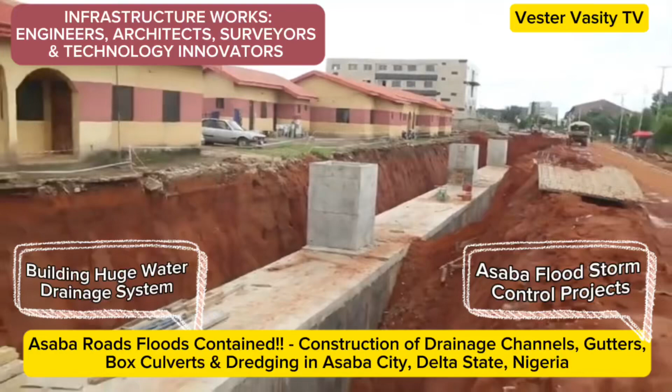The subject of discussion today is Asaba flood control projects.

The master plan projects consist of building a huge water drainage system with a network of drainage channels, gutters, box culverts, and the dredging of adjacent rivers, including sections of River Niger. It is a master plan consisting of 4 projects that all states in Nigeria, and African countries in general prone to flooding, should embrace and use as a model to control flooding in their communities.

Important things to note about this master plan: 1. It will create permanent maintenance jobs for the communities. 2. It will encourage foreign investment in Asaba City. 3. It will increase the GDP of Delta State and Nigeria.

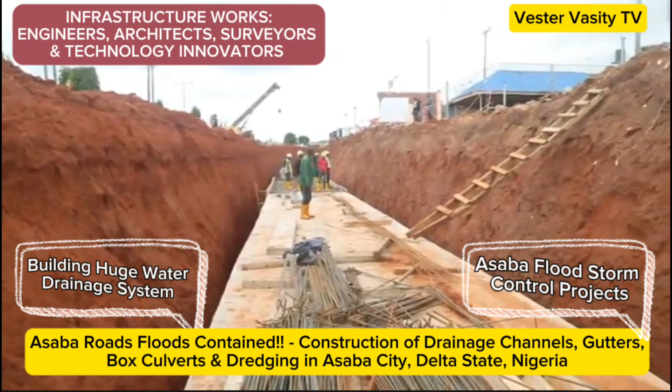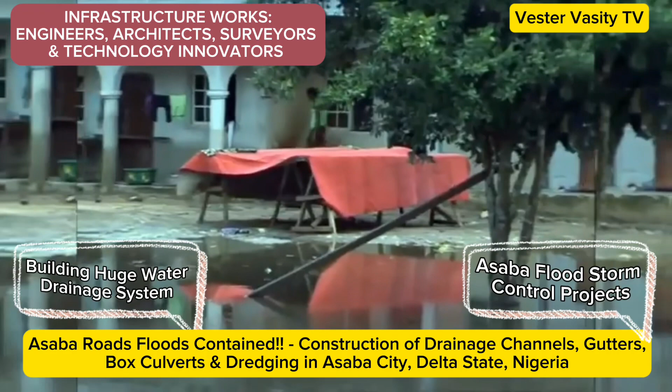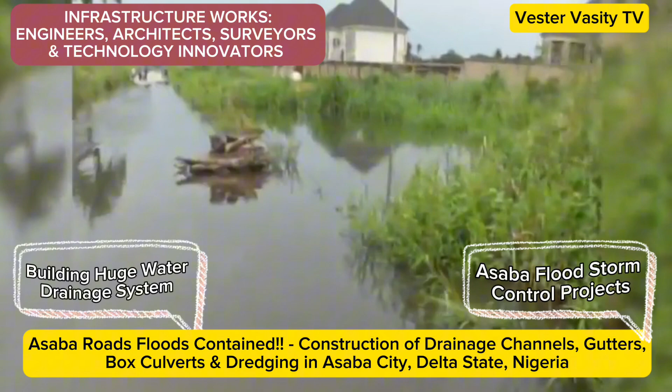Delta State, as a coastal state, has a peculiar topography that has made most communities prone to flooding and erosion. The fact remains that humans cannot stop the rains from falling, nor stop flowing surface water from bursting its banks. That is why it becomes important that people prepare for them or take steps to avert the devastating impact. We have a lot of tributaries of River Niger around the state, so it's prone to flooding.

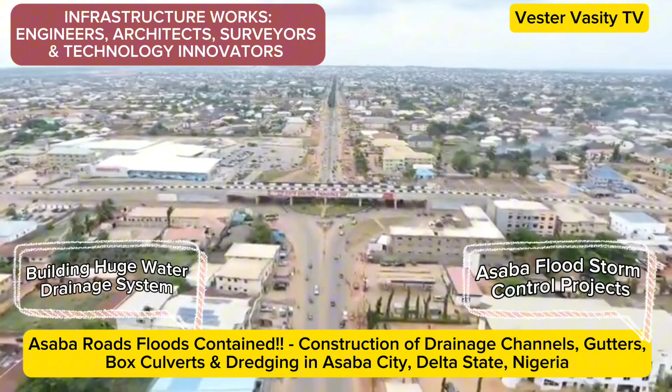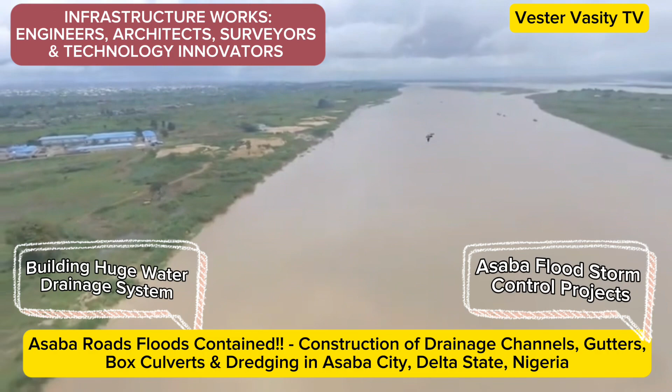Asaba, the state capital, is flood prone as it is situated at the end of a hill that starts from Okpanam town and the very low valley that stretches to the River Niger. These two factors have perennially made the city a receptacle for flood.

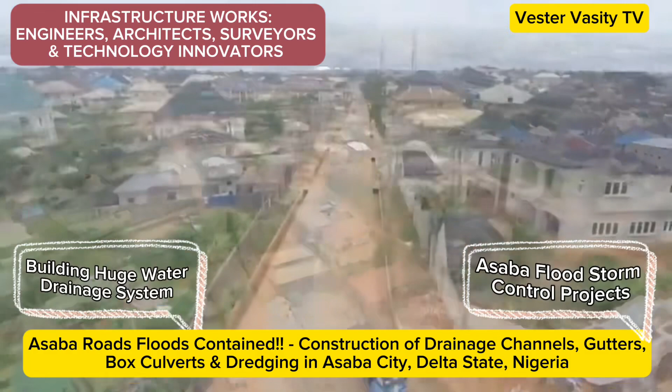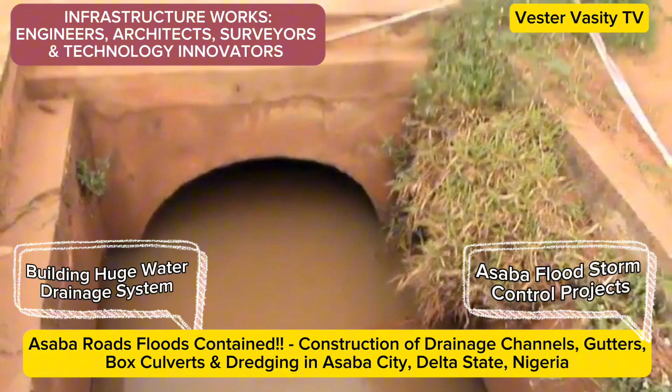With the increase in structural development of the Okpanam axis of Asaba metropolis, the menace of flood has in recent times become a huge challenge, as even the drainage projects done by previous administrations have been grossly overwhelmed by the large volume of flood.

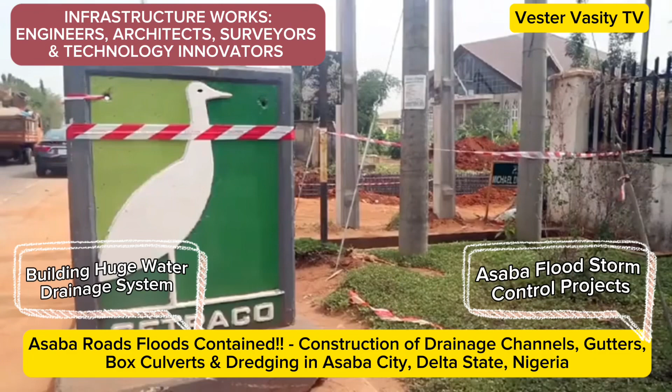We have engaged two very notable construction firms, Setraco and CCC, who are currently working on the flood issue from the Okpanam end and also in the Asaba metropolis. And we believe strongly that this will really help. If you go around the city, you can actually see it. When you talk about storm drainage, it's really storm drainage in the true sense of it.

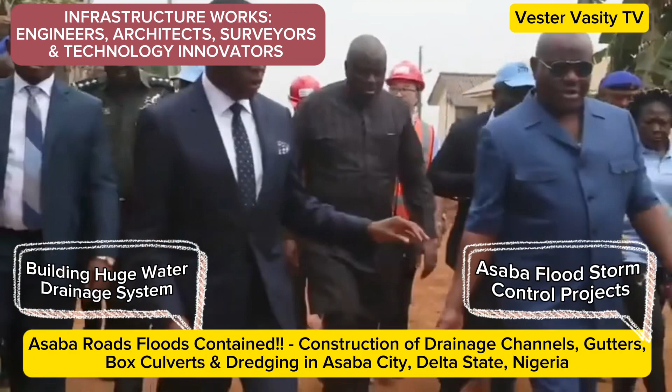In the face of this huge flood challenge, the administration of Senator Dr. Ifeanyi Arthur Okowa developed a master plan to tackle the menace in the capital city. The project, tagged Asaba Flood Storm Control Project, involved building a huge water drainage system to contain the massive flood that disrupts traffic and ravages homes in the heart of the city at each rainy season.

We've started 4 major projects in that direction. The one that is draining the Jesus Saves area, and another one, because we took different segments of the town, is being done by Setraco, that is going to drain the whole of the DBS area. Another one being done by CCC through the Ralph Uwechue Road, that is going to drain off the huge water storm coming in from the Okpanam area.

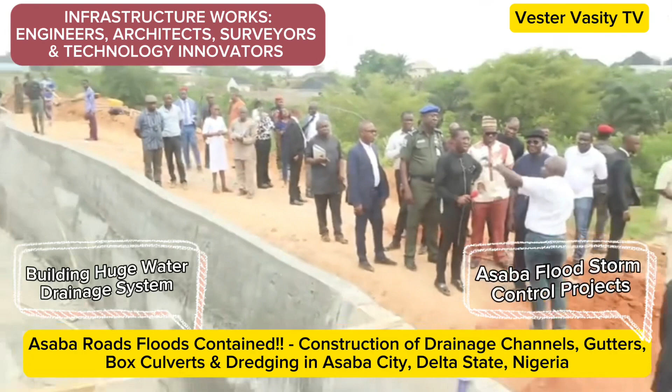All 4 are going on simultaneously, and we believe that on completion at the early part of 2019, we will not have the issue of flooding anymore in the state.

The drain project cuts across several major routes. It starts as a normal drain from many arterial streets that connect major roads, and progresses deeper and wider through the major roads up to the different discharge points.

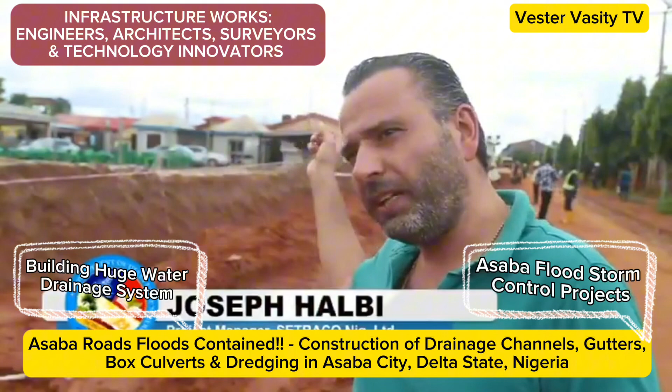This channel we are doing, connecting all these junctions and roads all over, will reduce the major or biggest part of the flood. When it is connected to the river, to the discharge point, Asaba flood will be reduced drastically.

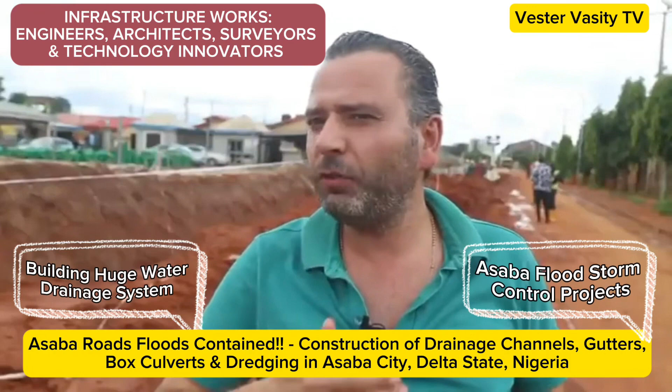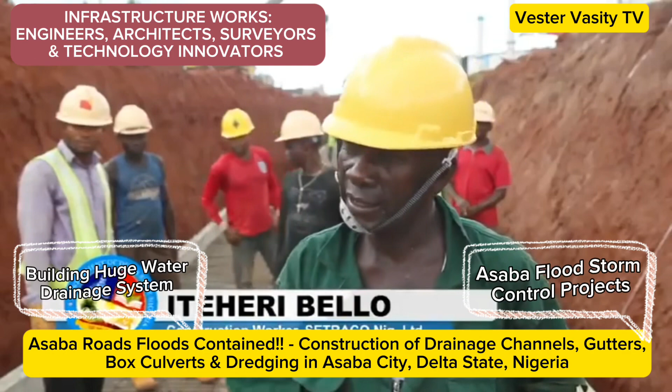Since we started doing this project, people passing by always commend the effort of the governor for having brought this type of drainage system. They say that for the past years, they wished there was a sort of drainage like this, the problem would have been solved.

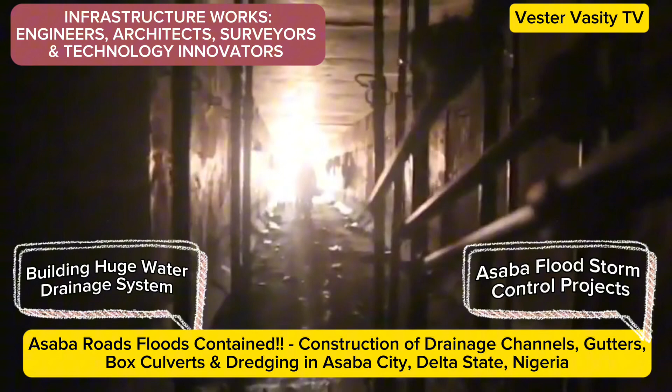Because it is big enough to carry any volume of water. And it's not only carrying it, it will deposit it right to the river.

The velocity of the surging flood from the hills of Okpanam has been intercepted at the Eagle Square Junction, from where the deep drain channels the water into the Iyabi. Each time rain falls here, the water flow is too bad. You can't drive your vehicle to pass here.

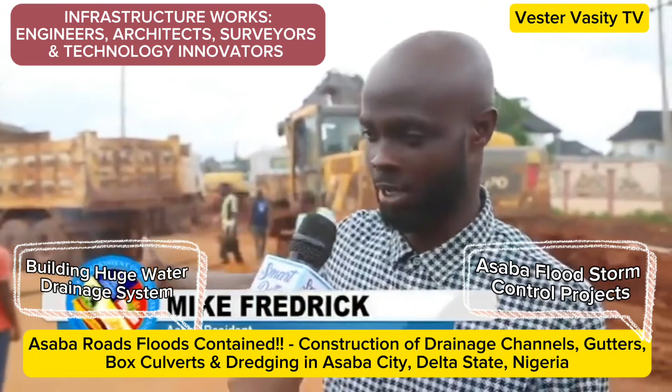You can't pass here with your leg. You must take off your trousers and pack your shoes. So imagine it, but with this job we're seeing here, we have hope that soon everything will end.

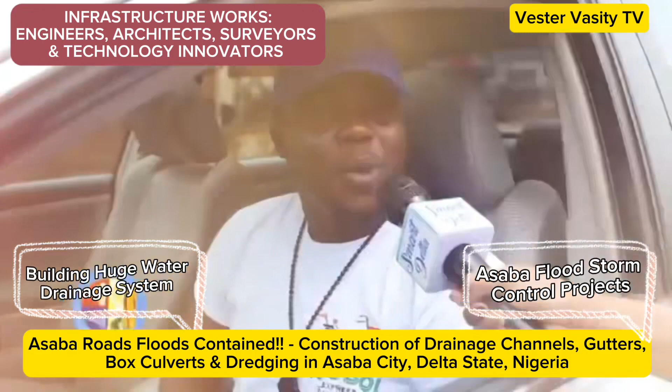I have to actually take my car to the mechanic most of the times because of the water and all that. But with the new drainage system, I think it's a bit better. Okowa is actually working, and everywhere around the state we can see that development has been going on.

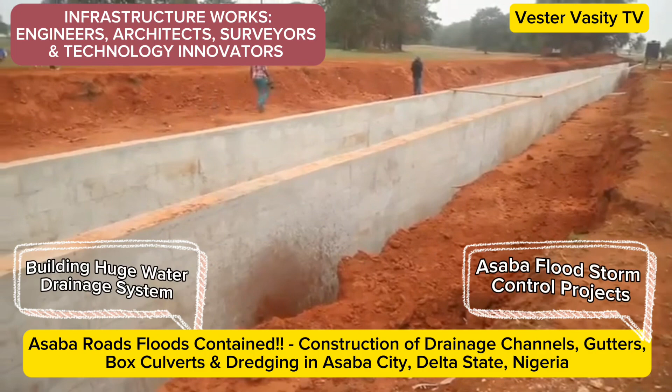Another remedial effort aimed at addressing the perennial flooding of Asaba has led the administration of Governor Ifeanyi Okowa to construct another deep drain from the Akbu Junction, right from the legislative quarters, to the Anwai River. This project spans several kilometers and is designed to address the remaining flood from the Okpanam axis.

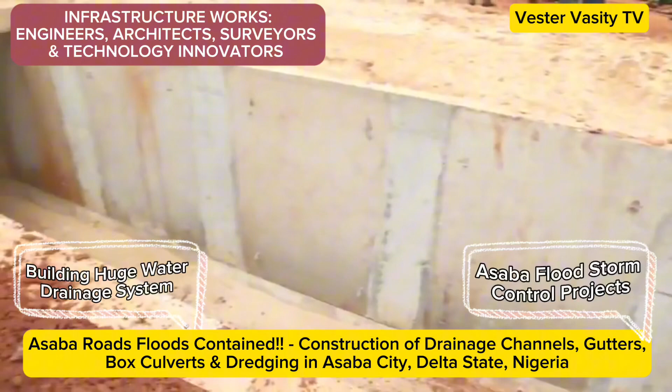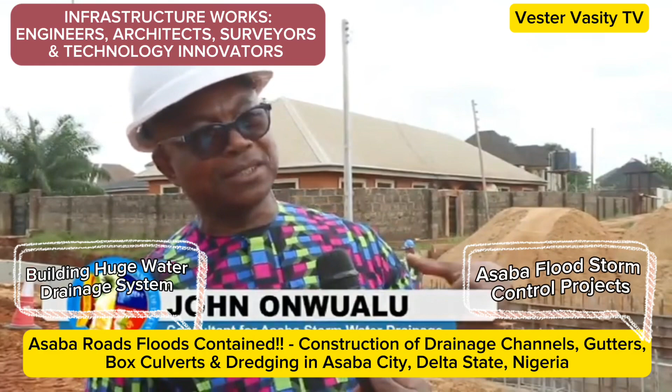The primary purpose of government, so this I believe will secure our people from the impact of flooding. It's one of the stormwater drainage channels being constructed to control the flood coming down from the upstream, from the Okpanam end. This section here is the 3 meter by 3 meter channel going straight to Anwai River, and it will enter the river after the bridge.

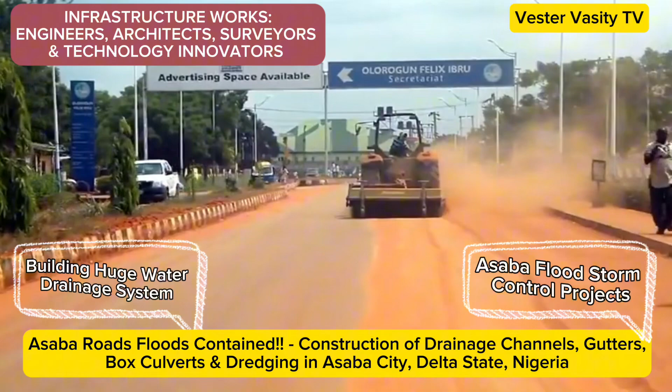Since the construction of the drainage, now we can move our cars. Also situated right at the heart of the Mariam Babangida dual carriageway and the DBS road corridor is another giant water channel. This particular channel cuts across several streets before passing through the government house, from where it continues yet again to the Anwai River.

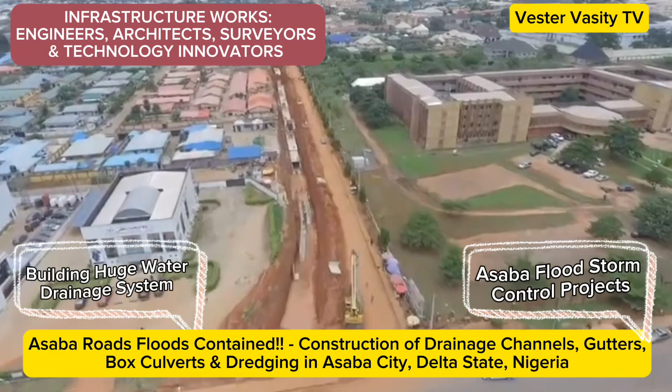The beginning is 2.4, but between here and the Okpanam Road, it has already gone down to 5 meters. What's the depth of this now? Here is about 3 meters. This project is actually for 12 months, that is 1 year, and it will be completed fully by the end of February 2019.

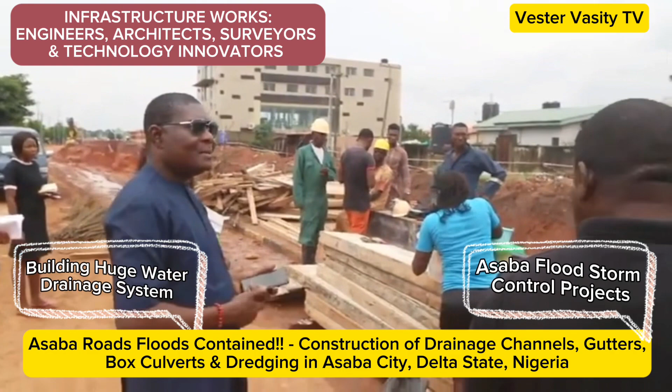I want to appeal to Deltans, especially those living along this corridor, to please be patient with us. What we are doing is for the good of all. Once it's completed, the issue of flooding will be a thing of the past.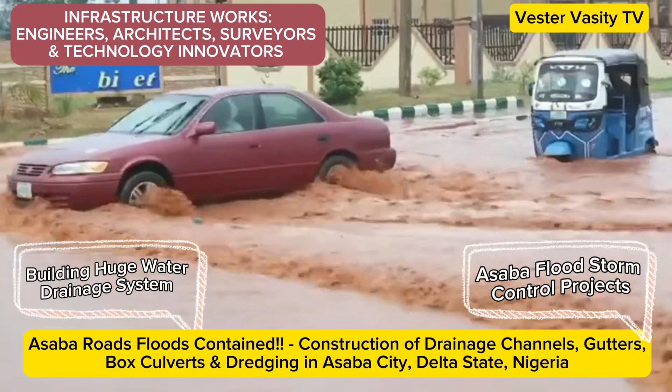Whenever it rains for a good 3 days, you won't be able to go out. You have to fold your trousers and swim through the water. But now, if it rains for say 30 minutes, the whole place is fine. You won't even see a drop of rain. The road is better than before.

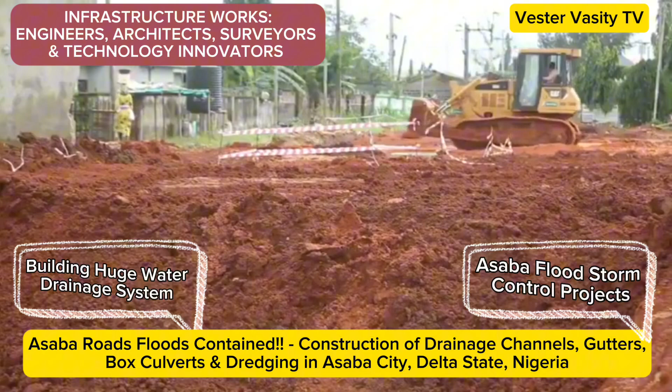In as much as they are still working, I know they will do a perfect job with what they have dug, flushing it into the River Niger.

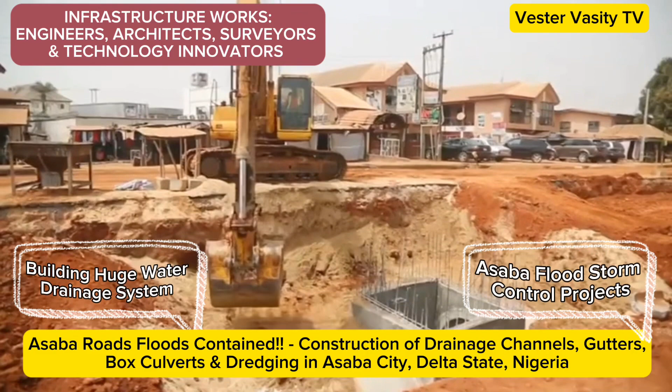Perhaps of interest is the depth of the drainages, as well as the dimension and strength of the concrete drain being used by the contractors to execute these projects.

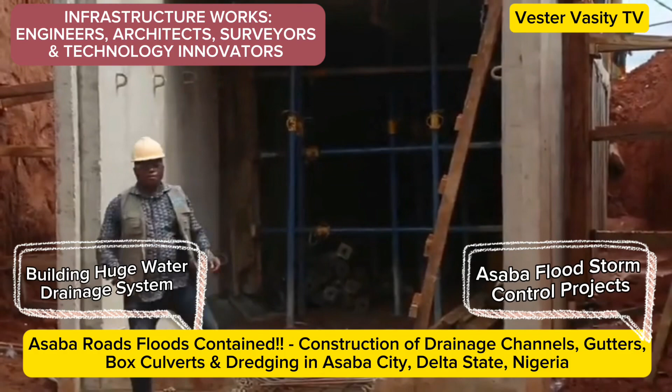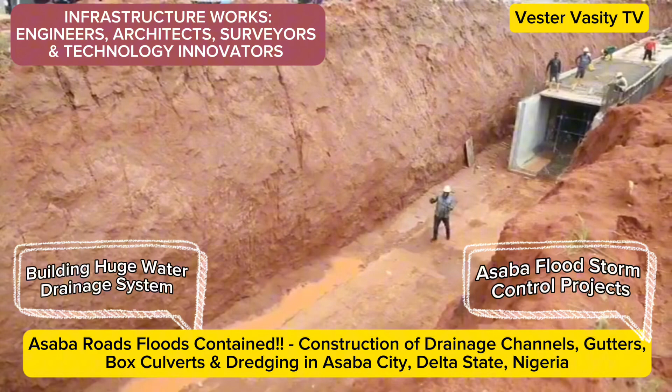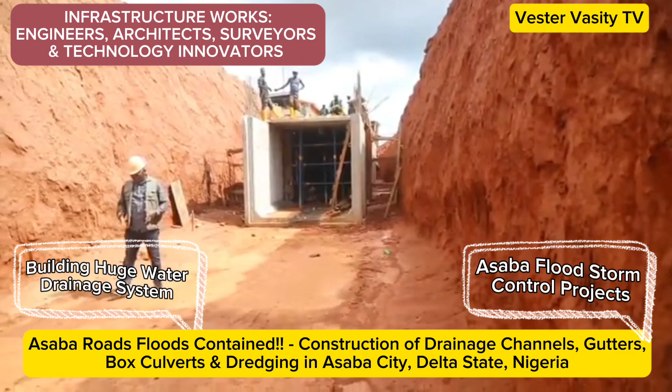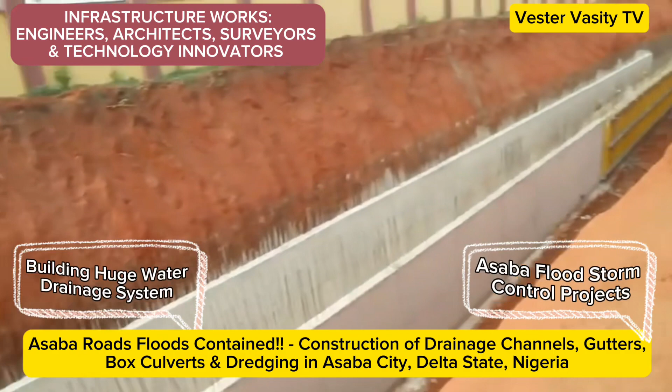I have just emerged from the tunnel of one of the major storm drainage projects along DBS Road right here in Asaba. From top to bottom, it's at least 20 feet deep right into the bowels of the earth, and it's wide enough like a dual carriageway. This project has been designed to evacuate storm water from Mariam Babangida and adjoining streets. It stretches for several kilometers right through the government house, headed straight for Anwai River to empty its contents.

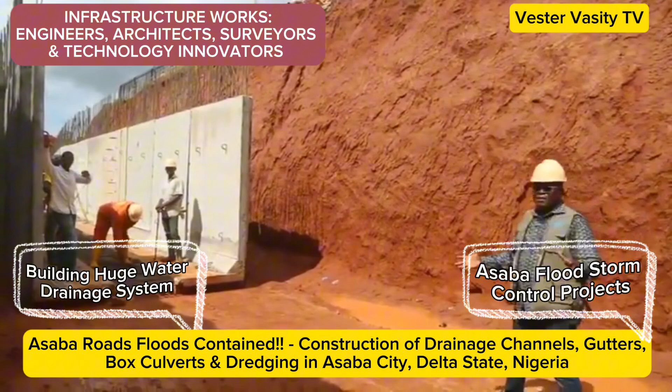Now what this reminds me of is the tunnel in the UK. The only difference is that this has not been designed to carry human beings, but rather to evacuate storm water. But one thing residents can be very sure of is that they are bound to enjoy drier streets right in the heart of the rainy season. Asaba has never known it this good.

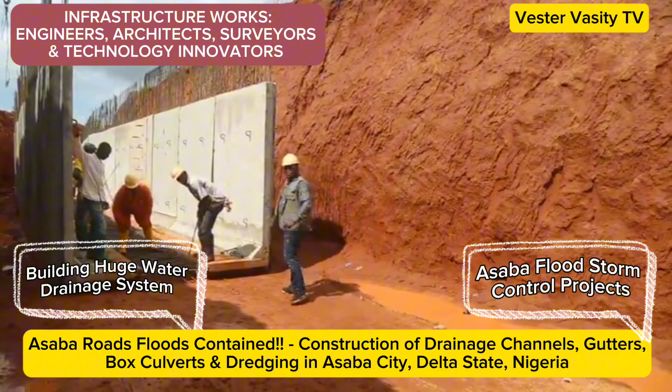If we are cautious that these debris will block the flow of water, and we start disposing of them properly, I think it will help these drains, help the flow of water. Because when these debris are not there, that's another advantage of the bigger drains.

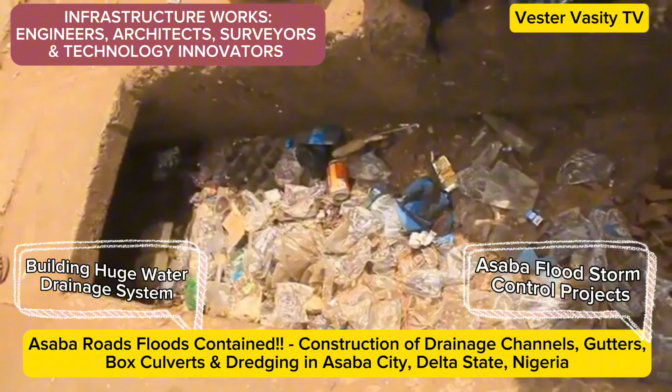Before debris gathers somewhere to block the flow, it should be cleared, otherwise it becomes a mammoth debris. My own advice is that Deltans should understand that the best way to appreciate what the governor is doing by constructing this drain is by not disposing our waste into the drains itself.

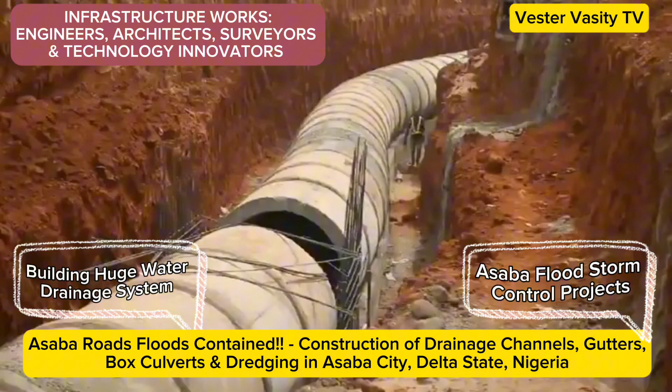Apart from these 4 major storm drainage projects, there is an effort to address all flood-prone areas of the state through major drains. There are drain projects going on to establish an effective network, and that has made Delta State confident that the drainage and flood storm control project will effectively address the menace of flood along this road.

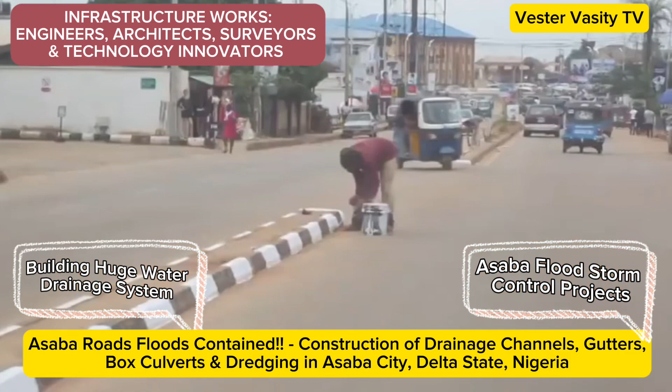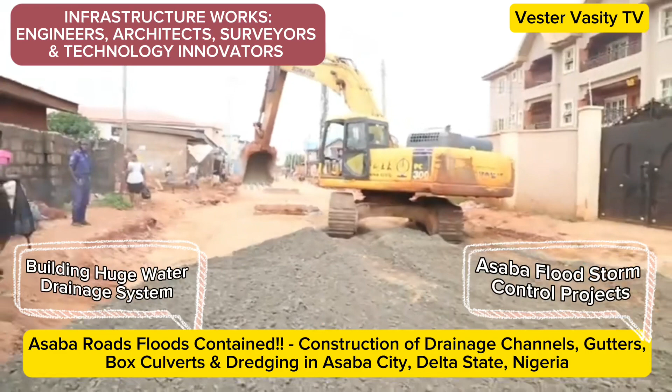So, in fact, it's a wonderful work. What is commendable is that everywhere used to flood, even grass grew on the road, sir. We couldn't pass it. But now it's okay. The government is trying, in order for the flood control projects to be effective.

In light of this, the fears and tales of woes which follow heavy downpours in the state took a different turn in this year's rainy season. Residents of Asaba and other adjoining communities testify to this fact.

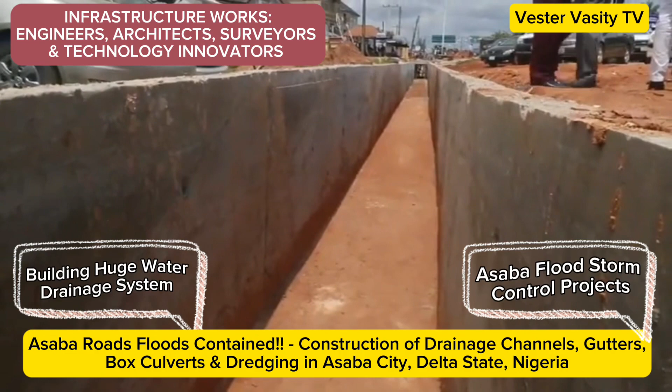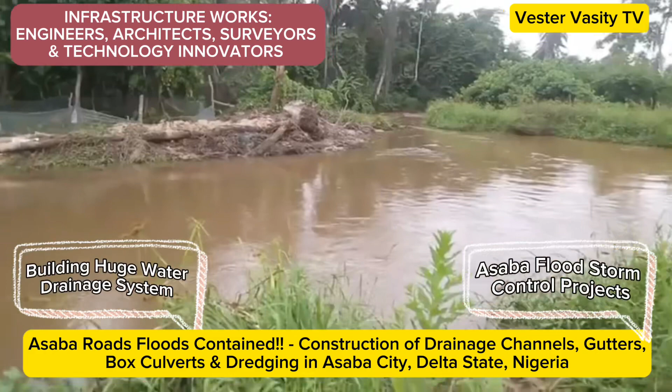Without this drainage being done, the whole of Asaba would be in a mess. I really commend him for that. We are hopeful that at the end of it all, he has dredged the Anwai River to increase its capacity to receive the inflow of flood water during the rains.

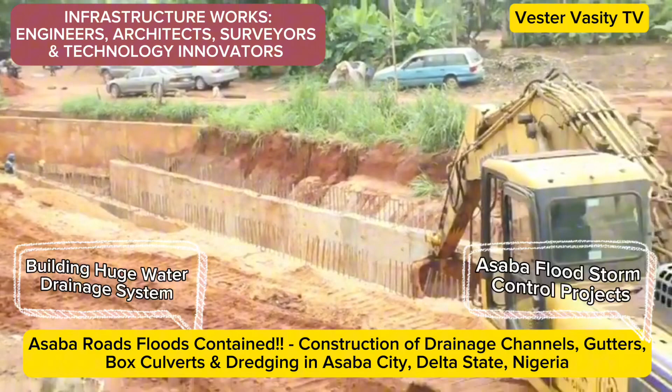It will also benefit not just the indigenous people, it will also benefit the non-indigenes through the control project in the state.

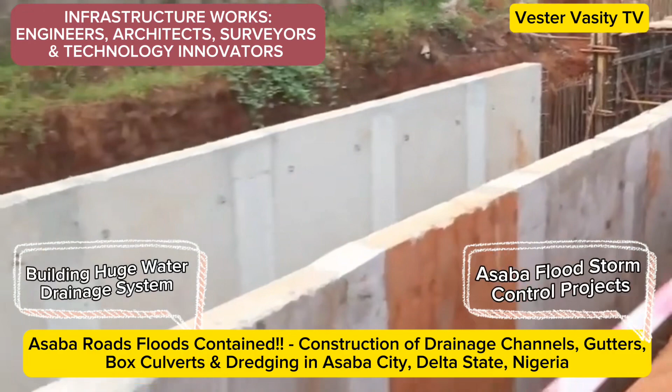To this end, the smart-thinking governor keenly inspects these projects on a regular basis to ensure standards are adhered to, because with that I'm sure I can put them under enough pressure. They are working hard, but I still believe they need to work faster than they are doing, and you see them increase the pace of their work, which is what we're experiencing.

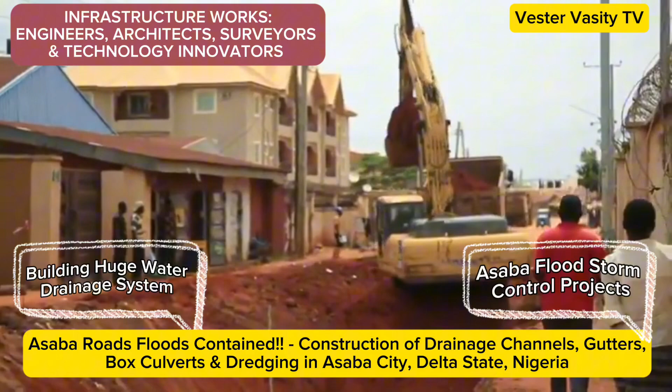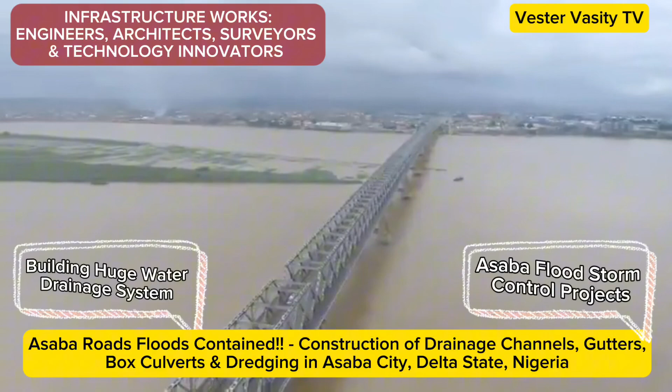The government's efforts are not restricted to the state capital; it traverses the central and south senatorial districts. At the last count, there is already a technical committee set up to evolve a flood storm control plan. Parts of the River Niger and River Ethiope are being dredged to enable them accommodate larger inflow of flood water and discourage flooding of communities, especially during the rains.

Communities like Eulu, Ishagu, Sapele and Jesse have benefited from the dredging exercise. Government is constantly excavating drainages of sand, refuse and all manner of barricade to ensure the free flow of flood water in times of rains.

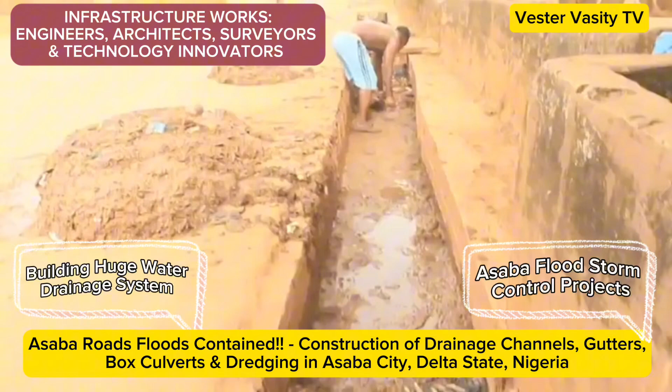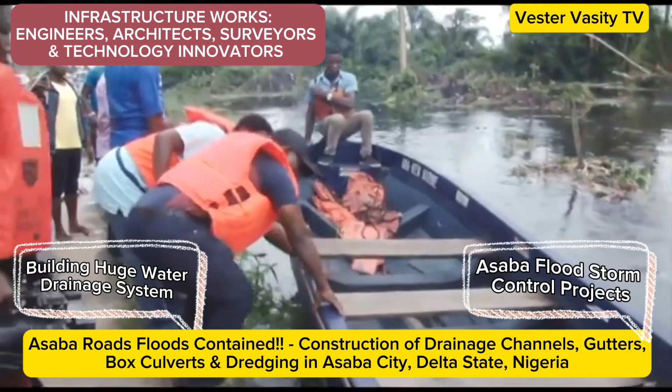To this end, the State Commissioner for Environment, John Nani, is regularly on inspection tours and supervises the mechanical desiltation and opening of natural waterways, clearing and evacuation of blocked drainages in Araya, Isoko South and Agbarho in Ughelli North local government areas, and construction of concrete box culverts in Otefe, Oghara and Jesse.

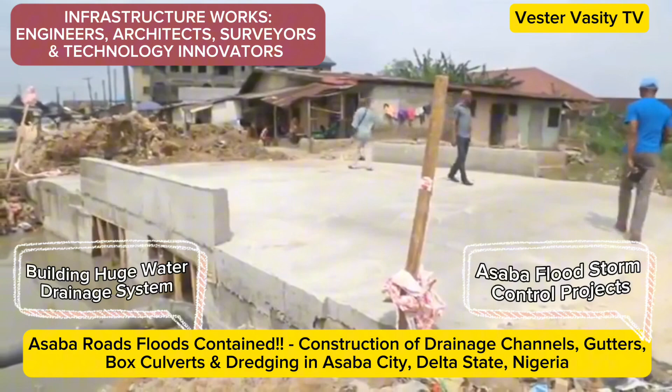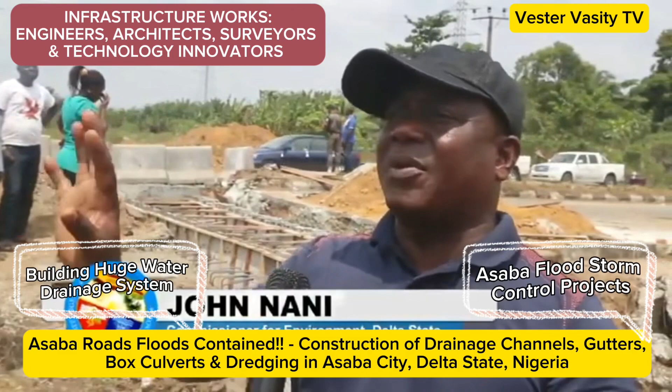We have gone round to see what is mainly causing the flooding: the olden-day culverts, like the Iteto culverts, which are old types. If debris comes with the flood, when it gets to where the culvert is, it gets hooked there.

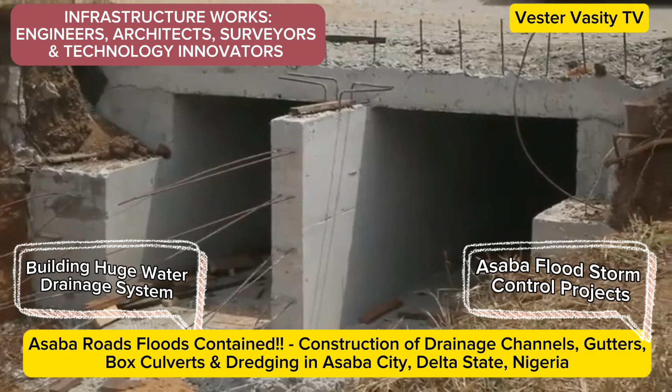So what we are doing now is removing the old culverts, which are the ring type, the circle type, and putting in the box culvert, the rectangular type. We know full well that as the flood water is coming in, it's going to flow through.

Whether there is waste in it or not, it's going to flow through to the discharge points. When the rain comes, it will no longer cause flooding in the community.

Beyond the core objective of deflooding major streets, the construction of the several storm drainages has provided jobs for thousands, both in terms of direct labor and sale of materials. This job creation is going on.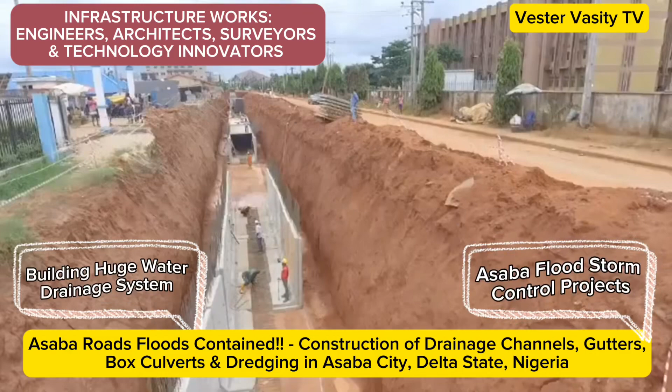People are being employed to work. People that sell food, those that sell clothes, come to sell to the workers. Invariably, money is coming out and it's moving around in circles.

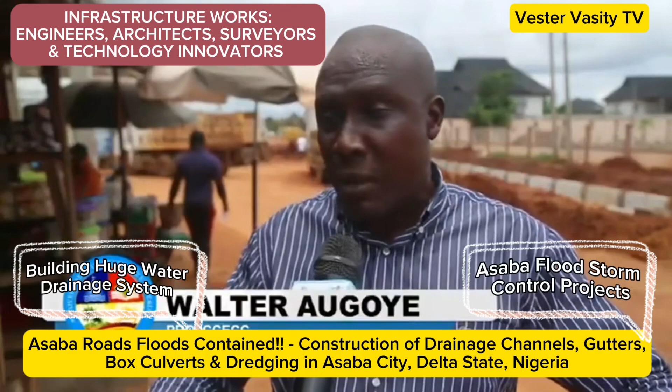By the time the month is ending and they start paying salaries, you see a lot of people having money in their hand, because from this job, money is spreading. They give to their families, maybe either in Cross River State or in Warri or in Sapele, wherever they are, it starts going on. That's one of the good things the project is doing.

If not for this work, I think I would still be at home doing nothing.